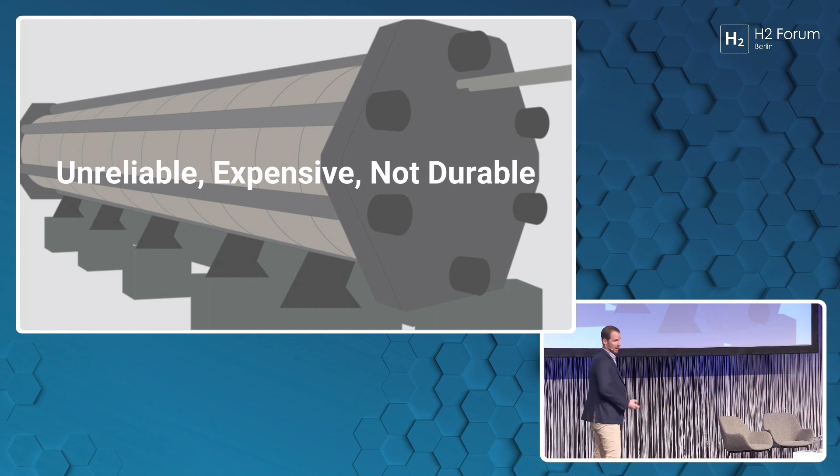So I know some of you will already be a bit skeptical about what I'm saying. I'm sure here at this audience, everybody is very aware that electrolyzers are unreliable, rather expensive. They do not last very long and also use way too much electricity. And I'm probably not the first startup that comes with these KPIs and says this can be done within a reasonable time frame. These are ours, by the way. This is the module that we're working on. But bear with me. Just give me 2 minutes. I'll get there. I'll explain.

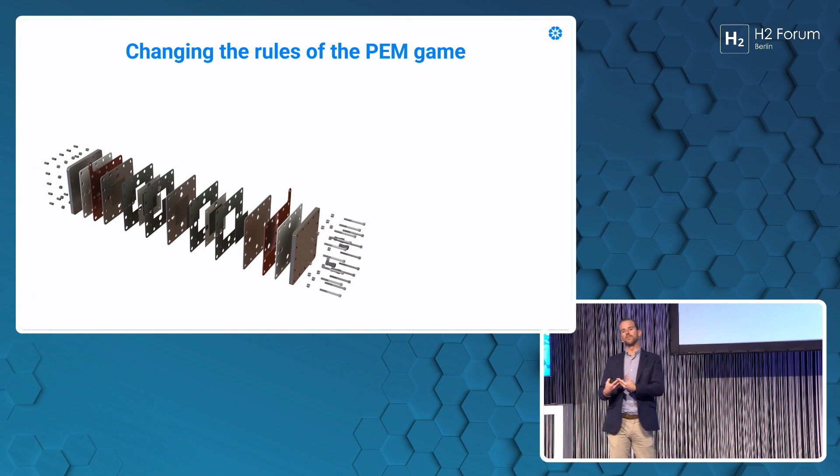So what we're doing here at 1S1 is we're developing a new proton exchange membrane technology, changing its rules. Essentially, if you want to remember one thing about us, it's that we managed to replace the PE in PEM. So we are working with novel proton exchange groups that have allowed us to completely rethink the electrochemical cell based upon a materials platform around the element boron. So we're working on all the components that go into these electrochemical cells, completely changing how it behaves internally, but it's still a proton exchange membrane electrolyzer.

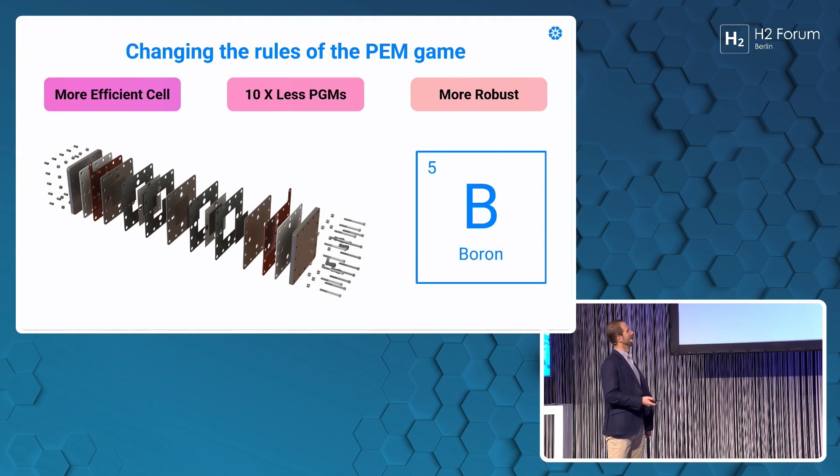So in our path to go to market, what we ended up empirically finding out is that customers are willing to pilot our technology from early on. So we have a working scheme with Enel Green Power. This is our first stack. It's a 300 square centimeter area. And this is 2 kilowatts. This has actually been tested in Italy together with Enel.

And we have a testing scheme with 2 utilities and a steel company that will go from a 6 kilowatt stack all the way to 100. And the 100 is the basis for the final product, which is a modularized solution of 1 megawatt that you can put together into any size of operation.

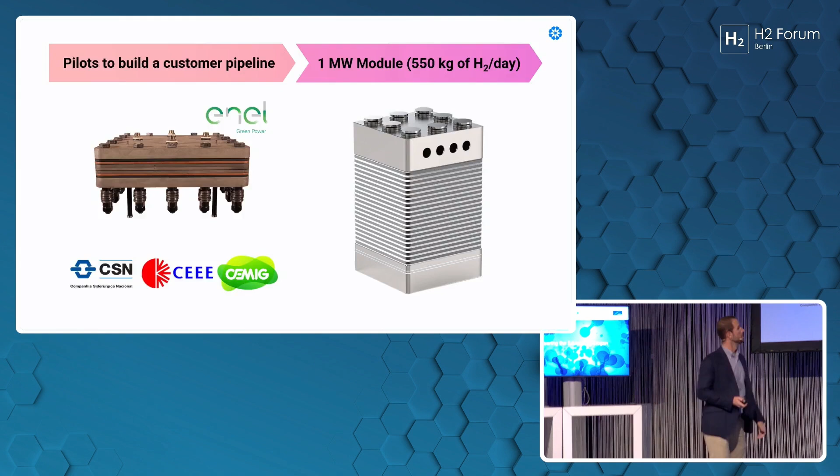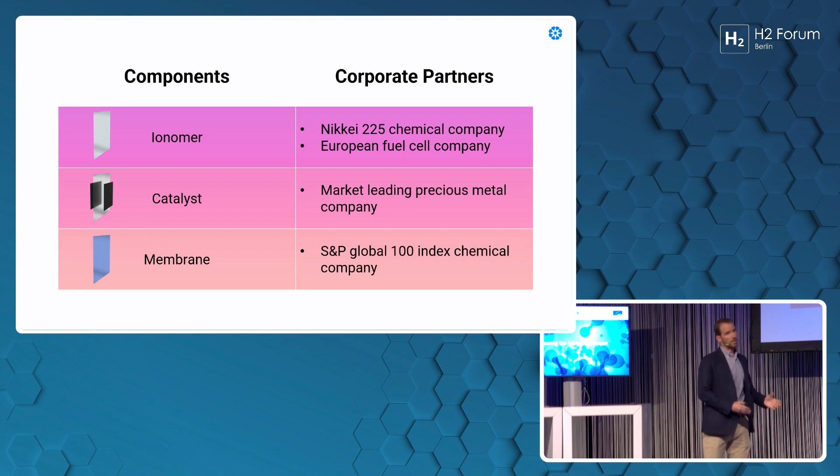So as I said, we're developing vertically integrated electrolyzers, meaning that some of the components that we're working on for electrolysis actually do work in other applications, especially fuel cells. This was pointed out by a customer of ours. So we're working on licensing or selling components in this field as well, as part of our strategy to go to market.

So maybe some of you are aware of that. We are one of the companies in the Hy2Tech IPCEI wave, with a project in Portugal to deliver capacity of 300 megawatts. And again, thank you for the opportunity of being here, H2 Hub and everybody.

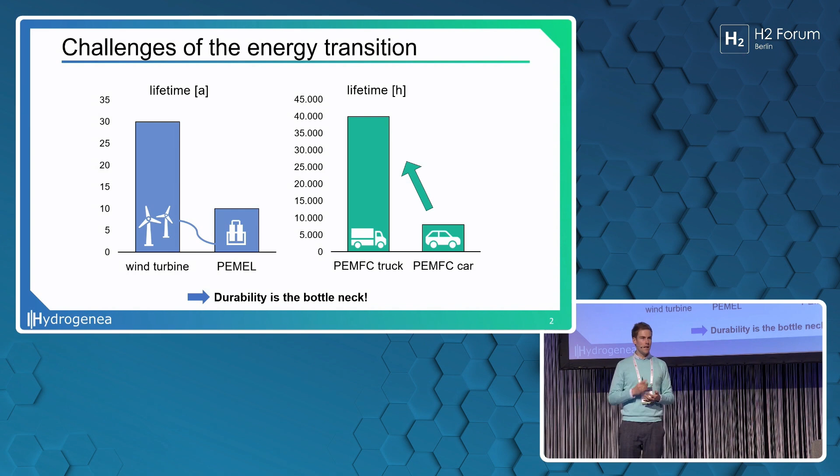On the right side of the slide, we see a scenario for fuel cells, and many of you might have already noticed there are already some fuel cell cars on the street, so you can just drive them, and it was already proven that 8,000 hours are possible for a fuel cell system. But a better use case for a fuel cell is the transportation sector - the column next to it, here indicated as a truck - and here we easily need 40,000 hours of operation. So in both scenarios, we need further development, and here durability is the bottleneck.

At Hydrogenea, we have developed the following solution: we prepare MEAs with a 10 times higher lifetime. In the application of an electrolyzer, this would mean an operation of 100 years becomes possible. Also, we have higher efficiency, which means in a scenario of a 30 megawatt electrolyzer, one can save 1 million euros of OpEx annually.

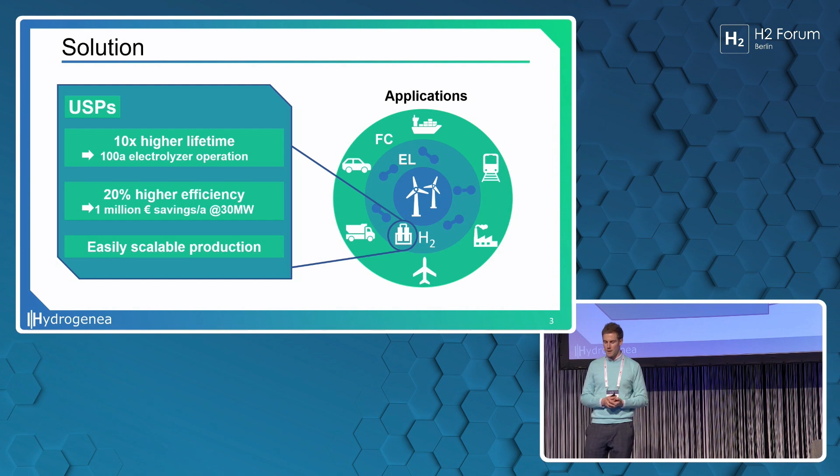Also, we have an innovative production process, which makes the scaling easy. I was just speaking about some benefits of using our technology in electrolyzers, but on the right side you see a lot of fuel cell applications where we also generate a lot of advantages and benefits for our customers as well. So now the question is, how do we do this?

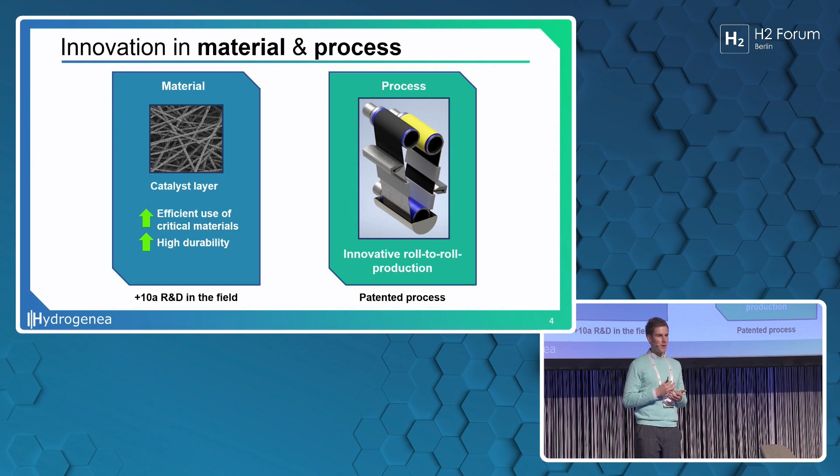We have an innovation in both material and process, and the journey for this already started more than 10 years ago. We put novel material into the catalyst layer, and also we have an innovative production process which works entirely continuously, and we got a patent on this. Both these innovations help us generate the best and most durable MEAs.

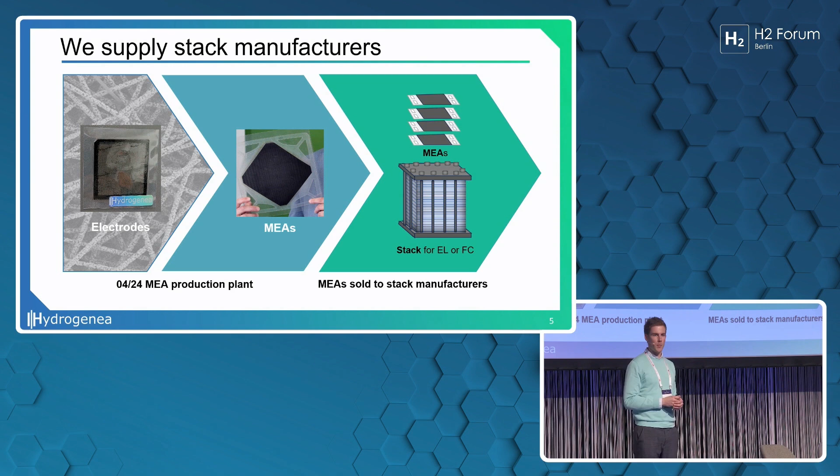With this process, with these two innovations, we first prepare electrodes, and then we prepare membrane electrode assemblies and sell them to stack manufacturers. A pretty big announcement is that in 2 months we are getting our production plant installed in the western part of Germany, in Gelsenkirchen.

So from our technology, our direct customers profit, but also their customers. The entire supply chain benefits from our technology.

What we did is start an EXIST grant last year in May. With this money, we could start building the core team, and also we started prototype testing with our customers. This January, the company was founded, and 3 weeks later we got our first customer with a 5-digit order.

What we want to do now is close our seed round, and we want to use this money to further expand the team and also to scale our paying customers.

In case you are interested in our innovative MEAs and want to learn more about how we make the MEAs durable, please come to our booth, which is the shared booth with the H2 Hub. It's booth number 11. My colleague Marlene and I are going to be there today and tomorrow, and we are very happy to have a chat with you. Thank you.

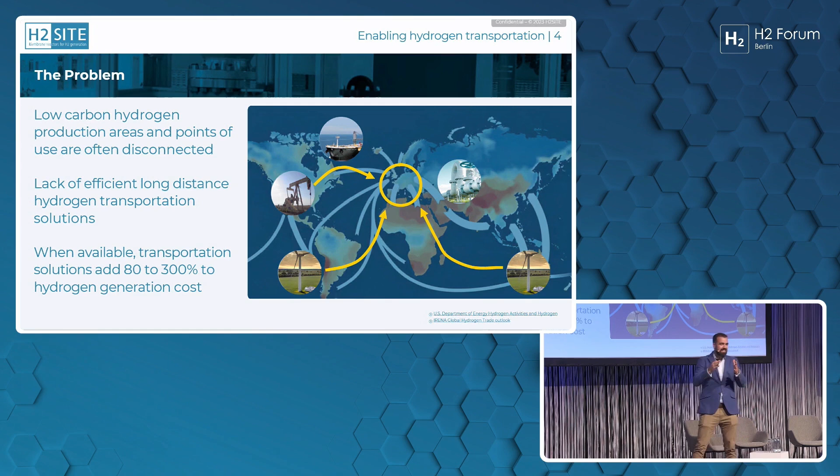So what is this technology that can allow ammonia to become hydrogen again? The current state of the art gives you a reactor that will break the molecule into nitrogen and hydrogen, and then you will have a PSA or a separation that will extract that hydrogen from the blend. You obviously have problems in terms of what temperature you need to reach in the reactor, and also how much hydrogen you lose when you separate it.

These are common challenges, and what we've done is mix it together. We have developed a membrane that extracts high-purity hydrogen from any feedstock, and we've integrated it into a reactor that works at the best conditions. The benefit of having it in a reactor is that if you put a catalyst inside, you start extracting hydrogen directly. So you work at a lower temperature and already have high-purity hydrogen—eliminating one phase and half of the temperature you need to reach.

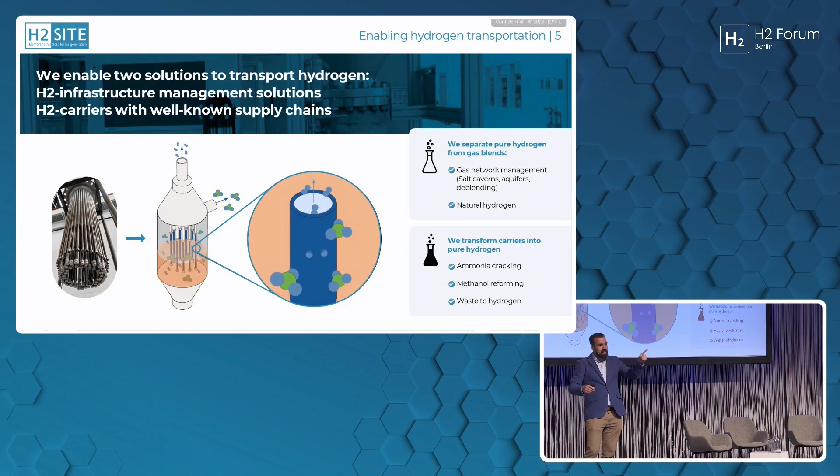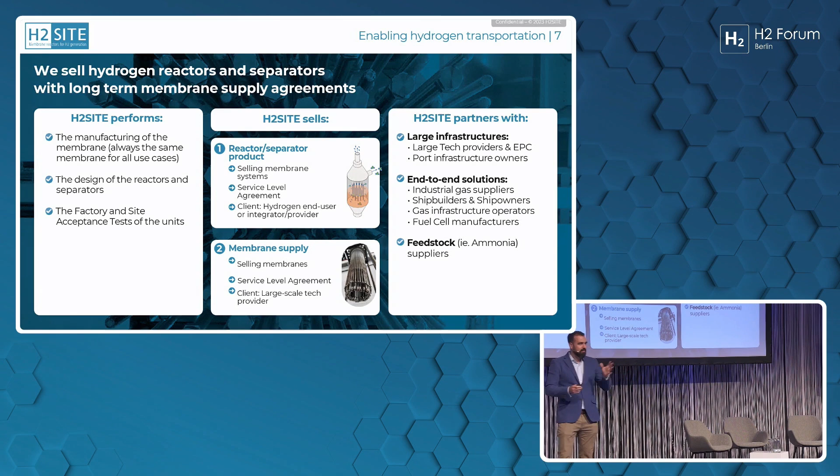So how do we make it? We have made these membranes. We can sell them, and we are partnered with other companies in order to scale up. While the membranes are already being produced, we have done more than 10 projects with this. We are also looking for partners to help us scale up this technology.

And where can we play? What is the opportunity for all of us? It is gas infrastructure management—how do you separate hydrogen from other streams, how do you bring ammonia into Europe and other regions that are going to be net off-takers, crack it and put it into a network, but also use it as storage for hydrogen and then crack it again. Don't forget, if the ammonia is coming to the ports, you already have logistics in place for it, and this is low carbon ammonia that can decarbonize 2.5% of global emissions.

So there is another part of this. And the last one—this was unknown almost a year ago—is natural hydrogen. There is hydrogen in the crust of the globe that can be extracted, and that extracted hydrogen needs separation. If you think about it, this sole opportunity can be one of the industries that will speed up the whole hydrogen economy, having more hydrogen produced quicker and also with a really small footprint.

What we're doing, we have the factory, as I was saying before. We can produce thousands of membranes. We can do what we need. We can make the kits together. We can put everything in a kit that is usable for everyone.

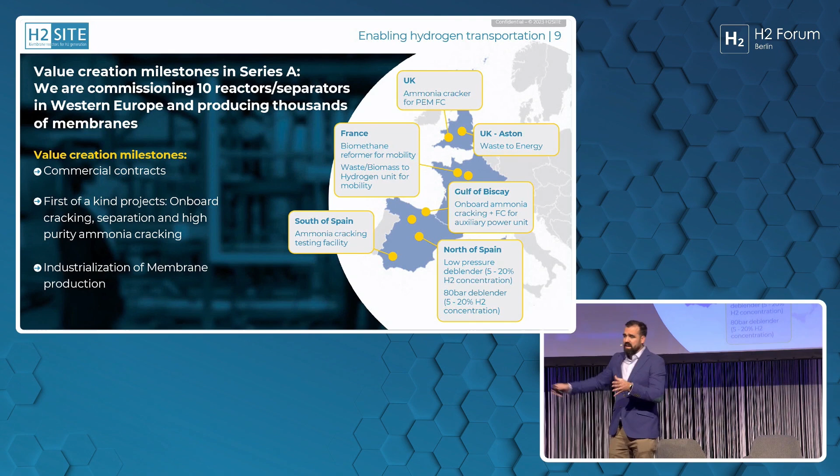And we have already done a few projects that are really interesting, like a hydrogen refueling station where you store ammonia, you put it into hydrogen and a fuel cell, or even that same setup for a boat, no? When you will have it stored in a boat, and you will have the hydrogen coming in a fuel cell to feed actually that boat.

This is it. So we are here to stay, and we expect to bring all that hydrogen in order to eliminate 5 gigatons of CO2 emissions with green hydrogen by 2030. Okay, thank you so much.

Guillermo, you mentioned several use cases, and maybe in the audience you have companies interested in cracking ammonia and getting pure hydrogen from it. When you look at these kinds of use cases and choices, what is your choice? Is it big industry, large scale, SME? What kind of project are you looking for?

So at the moment, we're looking to scale up. We know that we are fighting against companies that have been doing this for a really long time, especially in ammonia. But we bring something that is completely new. So we want to bring that new thing into our roadmap in order to be able to produce kits that will import those large amounts of hydrogen into the ports, etc.

So if we can produce something that is in the scales of 2 tons a day, 20 tons a day, 200 tons a day, we will be able to be one of the key players for the ammonia imports. Okay, that's big. Thank you so much.

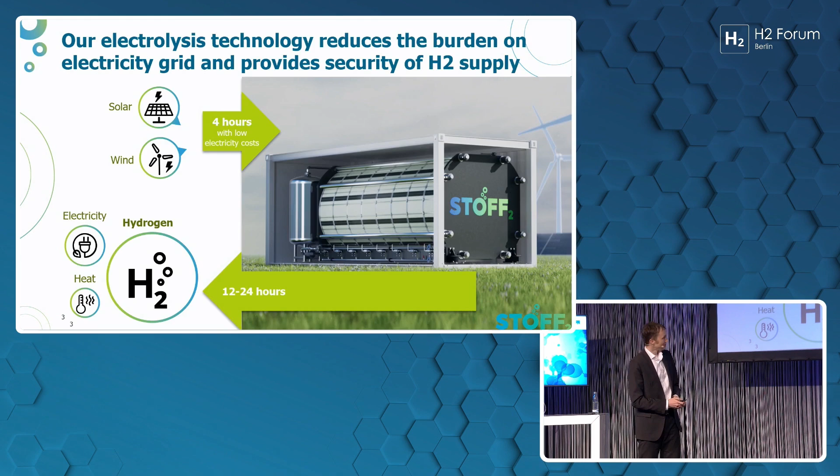How does the chemistry look? So we have a charging phase where electricity is fed into the system. We generate oxygen during that phase, and then we have solid zinc at the cathode. We have a storage phase that is typically storage over several minutes, several hours, typically 1 or 2 days maximum, but it can be stored also longer if that's required.

And then there is a discharging phase where the hydrogen is generated. And on top of that, we kicked out a lot of materials that are not so useful for everyone involved. So we have zero PFAS, we have no rare earth metals, and that makes our system a lot nicer for the environment.

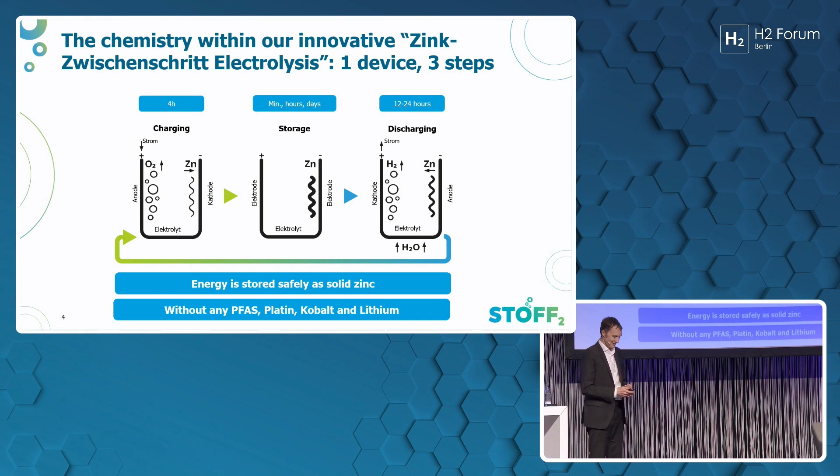How does the future look? So if you come to our office in Tegel, you can see this very fancy prototype that is up and running. It is 6 meters by 3 meters by 5 meters, and it's producing bubbles, either oxygen or hydrogen. It works very nicely, and that's up and running now. And if it's fully charged, you can get 250 kilowatt hours of hydrogen out of it.

And the next step will be that we quadruple the size, and then it looks like a 20-foot container with another 20-foot container for balance of stack. And we set up a small-scale manufacturing site in Tegel, and then we will go for first-of-its-kind projects that will start in 2025, 2026. And we will quickly scale up with large industrial partners.

This wouldn't be possible without public funding, and we received public funding during the startup phase, and that was very, very helpful. It's a pain to get it, but once you have it, it makes life a lot easier, and it helps a lot to scale up to this stage and also to further scale things up.

Hello, welcome. My name is Dominik. I'm the CTO of Turn2X, and we have a practical approach to lower emissions and to decarbonize the hard-to-abate sectors. End of last year, we went to the COP in Dubai. We met there as part of the European Resilience Leadership Group with industry leaders and policy makers to discuss the energy transition of Europe. The goal is clear, and we have learned a lot in the past time.

So, years ago, the energy supply was clear. Security of supply was not a question at all. We got cheap fossil energy, and we were building a large infrastructure. But times are changing, and we have learned a lot, and not just climate change is pushing us forward. So nowadays, there is some infrastructure, pipelines from the east, which are broken, no longer in operation. Diversification of energy supply is very important.

And yes, but what have we gained from these times? I think it's the most valuable asset for energy transport and storage in Europe. It's the natural gas grid. And we have 200,000 kilometers of transport pipelines, 2 million kilometers of distribution grid.

We have spent hundreds of billions investment in this infrastructure, and it's not just the amount of pipelines, it's the whole infrastructure, it's the energy supply of cities, the energy supply of large industrial centers. And when we're talking about energy transition, it's clear we're talking about electrification, and we're talking about hydrogen. That's not a question at all.

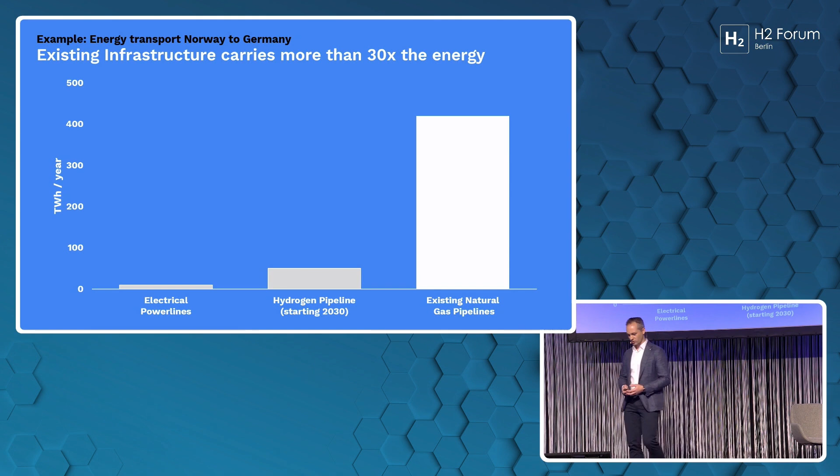And we have to put a lot of effort into building this pipeline. It takes a long time. And so what's the message here? We need all solutions to bring green molecules to Europe, to transport, to store it. And we as Turn2X, we make our contribution as RNG. RNG, we take water and air and produce methane out of it, more or less.

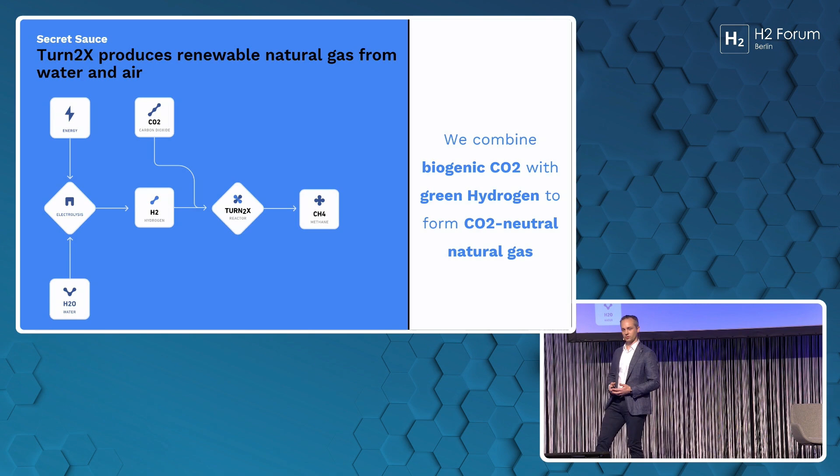So renewable electricity and water combined in an electrolyzer, producing hydrogen, taking biogenic CO2. We have a patented reactor technology to produce the methane, and the methane can be transported to our customers via the existing natural gas grid as a green molecule. It's not just PowerPoint. We also already have a plant. The pilot plant is up and running, was injecting into the natural gas grid in Germany, is now moved to Spain and will be back in production mid this year.

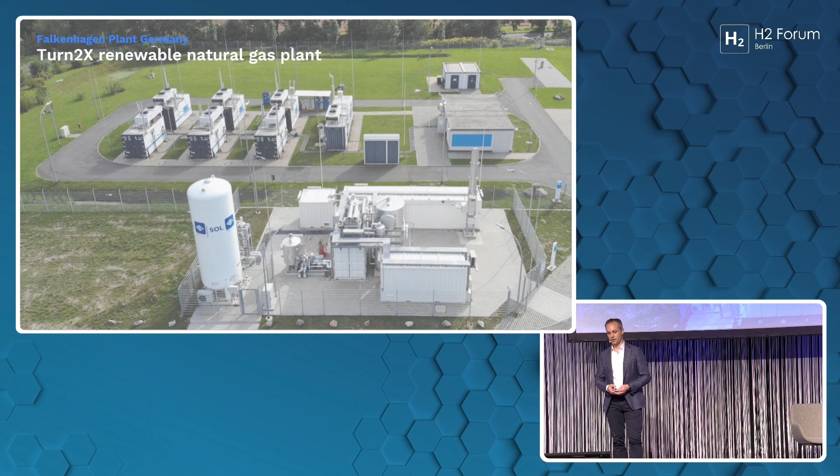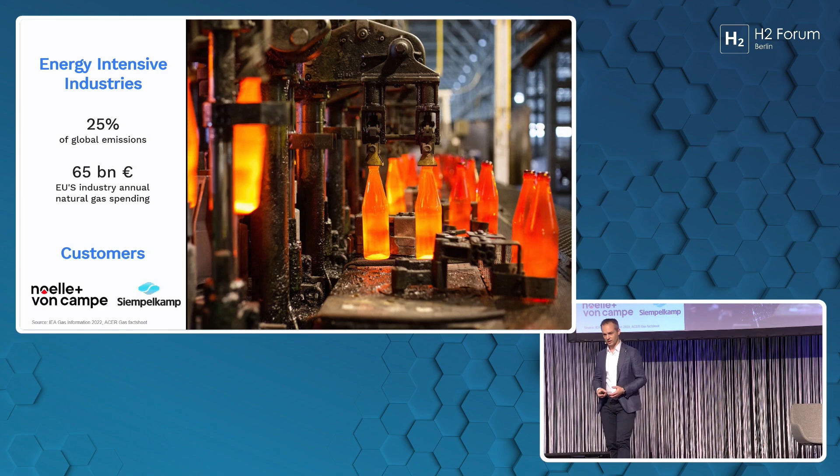If we have a look at our customers, energy-intensive industry is responsible for 25% of global emissions, spending 65 billion euros per year for natural gas. So our customers, Noelle + von Campe, Siempelkamp, will take the offtake of our RNG from the first plant. If we have a look at the utilities, 35% of global emissions, spending 42 billion euros yearly for natural gas. And also we have customers, for example, E360 from Zurich. They will also take a lot of RNG to get green molecules in their gas grid to their customers.

Last but not least, we have also the maritime sector, 3% of global emissions. They're spending 3 billion euros per year also for natural gas. Maybe in the future a little bit more, if they go to LNG-powered or RNG-powered vessels. So there we have some prospects, Hapag and CMA.

Let's have a look at the team. In addition to myself, there's also Philip Kessler, experienced in founding deep tech companies, so he knows how to grow. Benedikt Stolz, he built his own venture capital fund during college and went to the project finance part. So we have a lot of experience in how to finance infrastructure projects, and a strong advisory board in the background. We will build the largest RNG plant in the world by 2025.

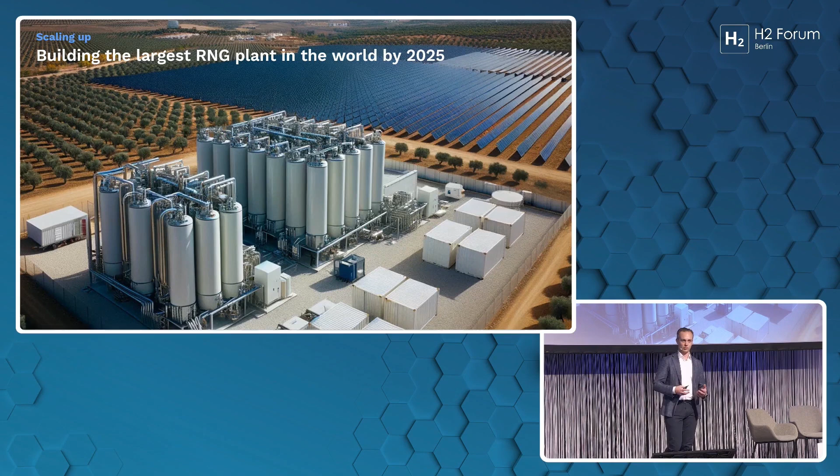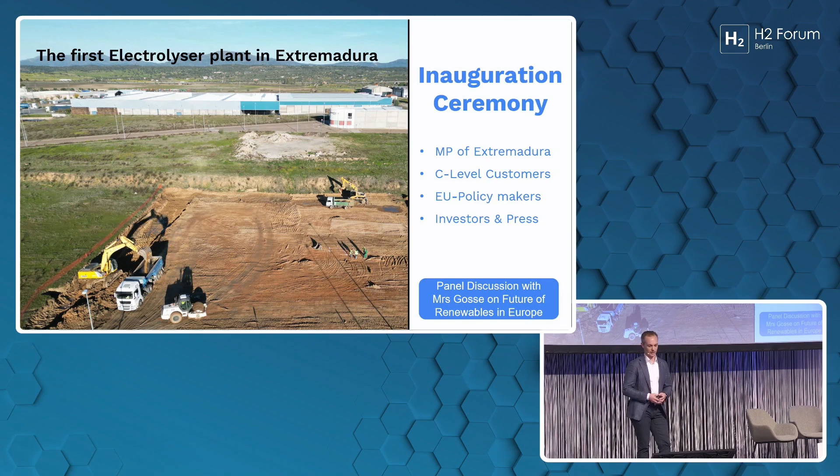So currently we are in the permitting process for Spain and in the engineering phase so that our plant will go live at the beginning of next year. And the first electrolyzer plant in Extremadura is also currently in the installation phase. I was telling you we were moving this plant from Germany to Spain, and there it is. So the first electrolyzer in Extremadura which will be in commercial operation at all.

So what's the one thing which would speed us up? Experience in construction, plants, equipment manufacturing, and standardization. So if you're able to produce standardized modules in high numbers, then let's stay in contact, let's talk, and save 12 million kilograms of CO2 per year together. Thank you.

Thank you very much, Dominik. We heard a lot about the importance and necessity of building infrastructure. So is Turn2X the solution to this infrastructure crisis? It could be a part of it. We are a part of the solution.

We're talking a lot about these FID dilemmas today, so that you get FID on the project. And in our case, we have the infrastructure and we get the financing for the project. And then we can show the whole process and don't rely on the infrastructure change. We don't have to wait until a hydrogen grid network is up and running. So we can show it today. Great. And these things are already happening. Thank you so much, Dominik.